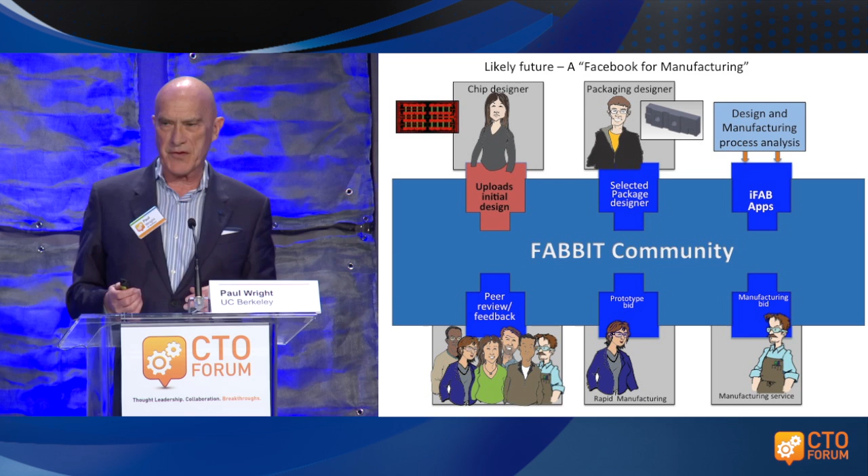So in this final slide of mine, you have to look at this in real time. This is a design being done in a lab, and it's being sent over the internet to a molding company. The idea here is that the designer says, I'd like to set up a mold to cast this model in bronze — how should I go about it? But immediately, that person is getting real-time feedback from the molding house, which might be many time zones away, discussing some of the more difficult parts of the device.

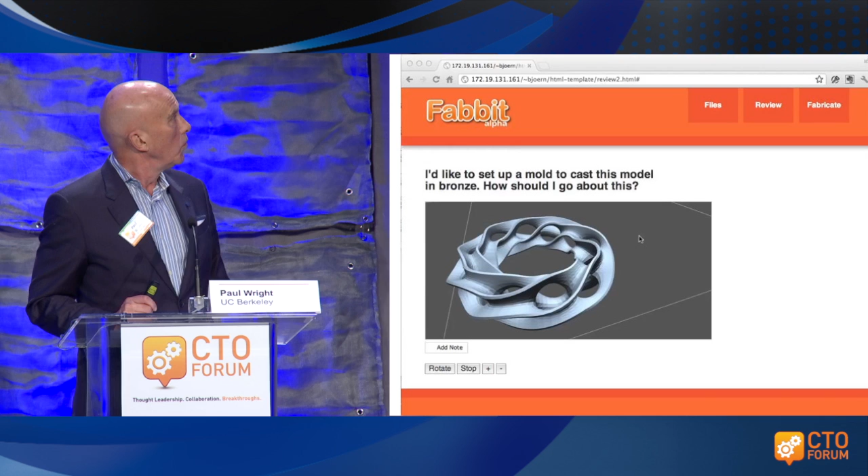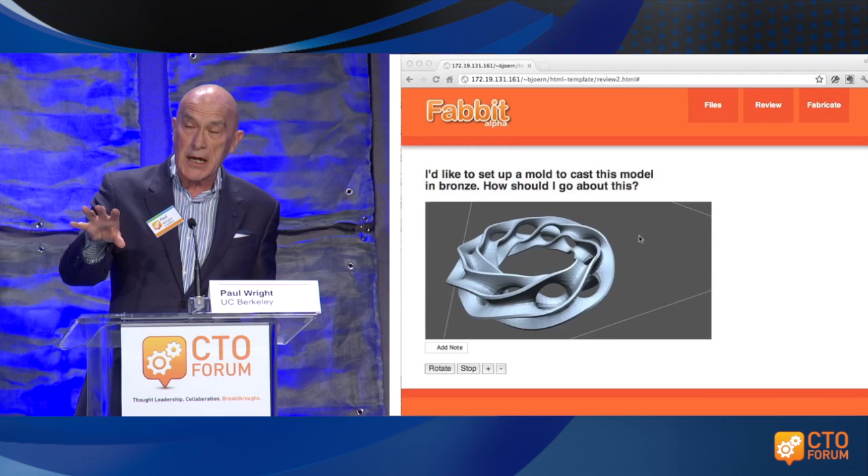As the end of the product there, what happens next, if I'd continued this, is the designer is told by the manufacturing people that it can be made, but it has to be split into 4 different components — there have to be 4 separate molds — so you can go ahead provided you make this particular change. The goal, what I thought about this project a long time ago, was that I wanted to have a silver-haired machinist looking over the shoulder of a younger designer, trying to give them pop-ups and advice about how to get that going.

Even in my class, I emphasize very quickly, even though I'm teaching them about 3D printing, that it would be a disaster if they leave the class thinking that 3D printing gives you the device, because eventually it's going to go to a molding house and you think about draft angles, shrinkage, will the mold fill, and will the printed circuit board fit in there? So this interactive design that I tried to capitalize on in that previous slide, I think is really key to manufacturing and the front end to manufacturing.

So with that in mind, I think the first thing I can do is hand over to Jason, because with his really exciting technology around 3D printing, I think he can describe some really interesting new techniques there with many new different kinds of product opportunities. But I think you'll agree there's some advantages to traditional manufacturing, but you have to be careful and wily about how it's going to be rolled out in volume. Is that a nice tee up for your talk?

Sure, that's terrific. Yeah, it's a pleasure to be here. And what I'd like to talk about today is 3D printing, but I'd like to start with the question of why isn't 3D printing used in manufacturing? I think immediately two answers pop up.

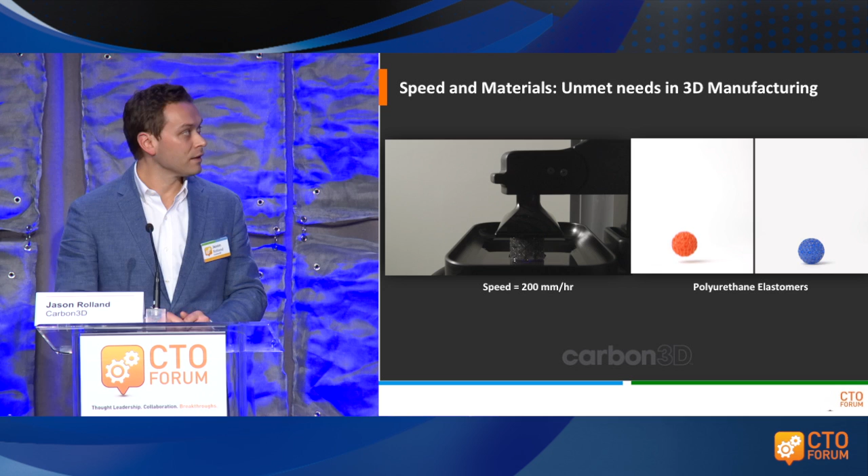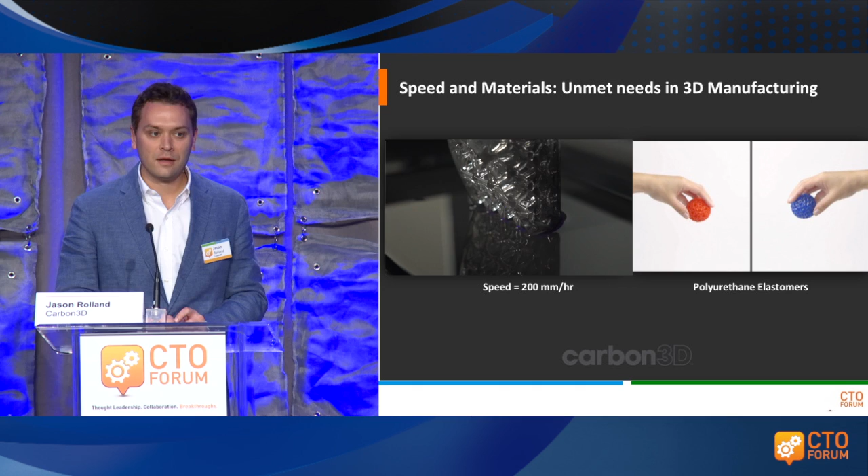Another big issue that we believe is solved by CLIP is we're able to print with new material, high-performance elastomers. The unique features of CLIP have allowed us to create many different categories of materials useful to designers. Elastomers are very difficult for any 3D printing technology, and we've been able to unlock chemistry that allows one to do that. I have samples at my desk if people would like to see them.

So in closing, Carbon3D exists to enable designers and manufacturers and creators like yourselves to create the products of the future, starting with the functional prototype, but eventually paving the way to 3D manufacturing and being able to open up and free creators from the design constraints of generating products.

That's a great summary. Thank you. Thank you very much, Jason. Let me switch now to Robert, who also has been prototyping new products in the space of microfluidic systems, biomimetic camouflage and display, in the same kind of space as Jason. Robert, maybe you can expand on some of your prototyping work and markets for it.

So I'm actually a consumer of machines like the ones Jason is making and adapting them for new things. If you think about the assembly of transducers into complex machines like actuators and sensors, you can start with basically soups of liquid that do interesting things, like that are electrically conductive, allow capacitive sensing, and allow forceful actuation and electrical displays. And you can use existing manufacturing systems like injection molding, rotational casting, and even 3D printing.

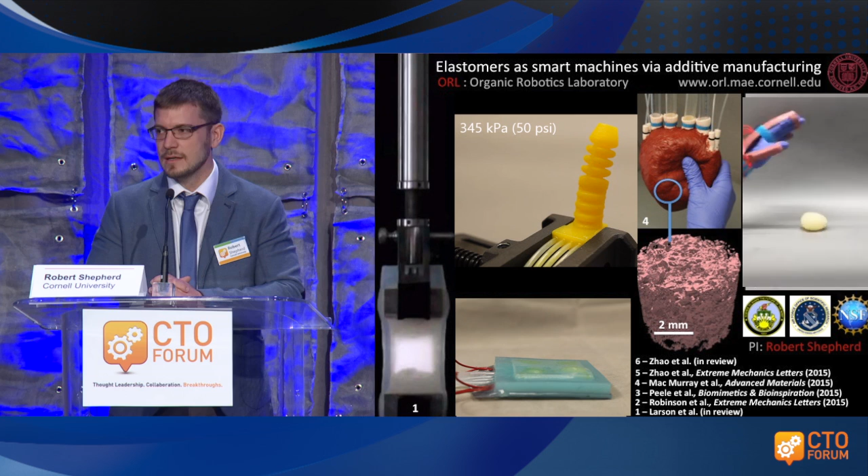So this display on the left is the most extensible display in existence using electrically powered light emission. It's a linear strain of 500%. The next best system that I'm aware of goes to 200%, an OLED-based system. Made very cheaply, very quickly. It's obviously a low-resolution, 1 pixel centimeter square area display, but we've actually now scaled it up to millimeters squared over 10 square inches.

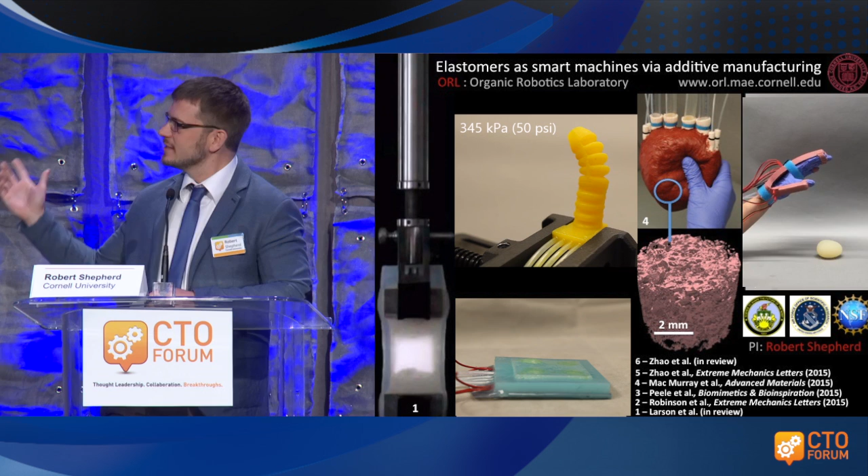The yellow tentacle-like thing was 3D printed on a system similar to what Jason talked about, but much slower because we don't have Carbon3D's substrate capabilities, and I assure you we will be the first people to buy it academically when it's available. The heart that you can see is an injection molded silicone foam that pressurizes two internal chambers and actually pumps liquid. We intended it just as a demonstration, but it turns out that medical doctors really do believe it's useful for non-invasive or less invasive ventricular assist devices.

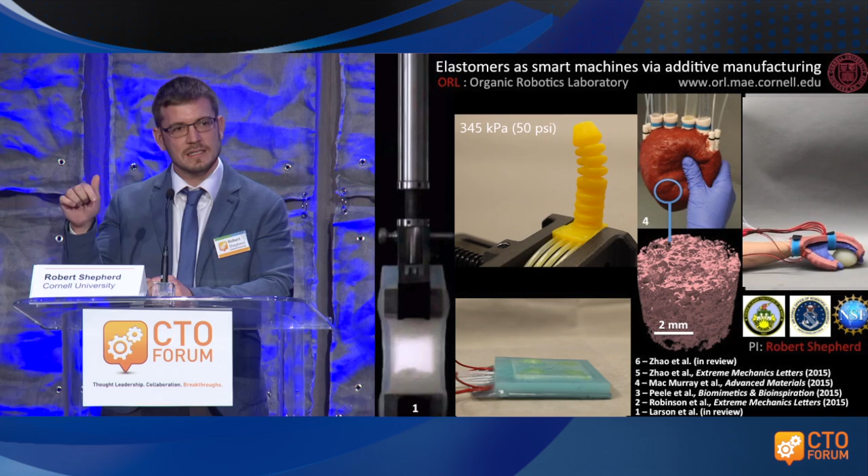And the video on the right shows an orthotic that we rotationally cast, a feedback-controlled orthotic that allows assistive manipulation of delicate objects, as well as allowing people with reduced musculature to apply greater forces and assisting in the rehabilitation of stroke patients. The bottom left video shows a feedback-controlled haptic interface with a soft skin that operates a lot like your skin on your hand, feeling touch, and then it displays that back pneumatically. All of these using existing manufacturing methods, very rapid.

And I'd like to point out, continuing the theme of talking about Toyota, that their vision is one-piece workflow. And these methods are all intended to get towards that ideal. And with Jason's technology, I think you can actually get to that ideal. Good, that's a great start. And Rob, we'll come back to both of you in a second.

Now, with Jim next to me, the thing to really begin to stress is how do these very exciting technologies that you've seen in these videos, producing one or two components at the beginning—and Jason said it's slow—and you don't always get a product out which is mechanically viable. Eventually, all of these exciting new technologies need to be scaled up in factory situations. I think that's where Jim has the experience of doing that kind of work, and I'd like to hand over to him to look at the big production volume aspect of these exciting new technologies.

Thanks, Paul. So I'll move us from micro to macro. I have UCLA by my name, but I'm actually here as a result of the SMLC in the upper left-hand corner—that's the Smart Manufacturing Leadership Coalition. I'm the CTO of that organization, which is 50 companies and institutions implementing smart manufacturing. So you're going to find that my remarks are very, very similar to Paul's.

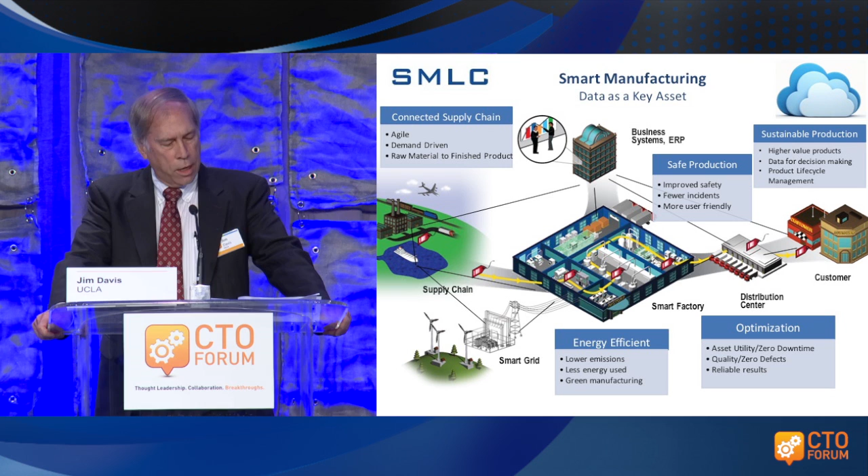It is about getting at sub-optimization, where there are seams and transactions, as we call them, as a result of compartmentalization, and it is about going after untapped opportunity with enterprise optimization. The one thing I would add to what Paul was saying is, to us, smart manufacturing is about unprecedented real-time data and modeling capabilities that are applied through modern cloud technologies—technologies that have already transformed other economic sectors. So we're bringing cloud in a functional way to manufacturing.

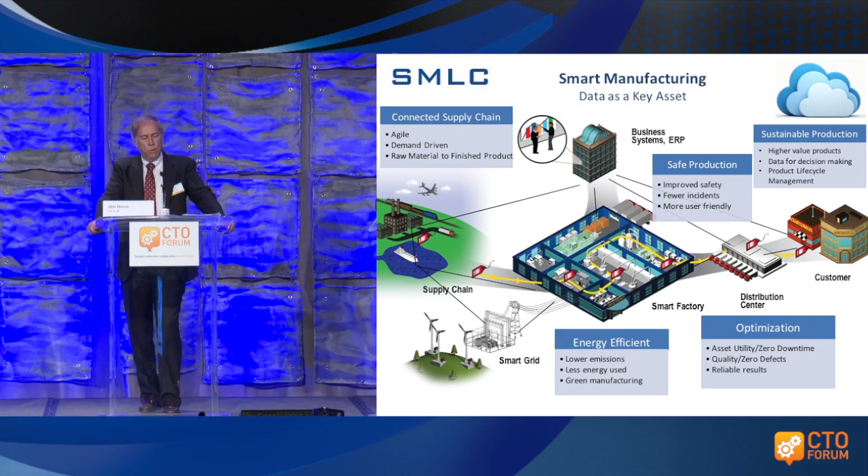So I'd like to just explain smart manufacturing with a few simple examples from our coalition. If you just think about the chart from right to left: one of them is General Mills in Minneapolis, which is shifting from error-prone product forecasting to customer demand-driven production, and it is reducing its inventories—by reducing it, you reduce the probability of contamination.

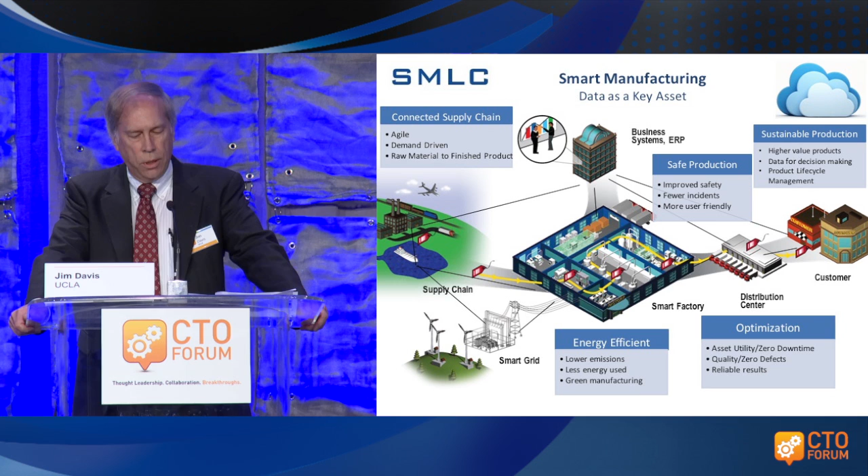Praxair in Port Arthur, Texas is using image sensors and high-fidelity modeling so that they can see and shape energy distribution inside a steam methane reformer, saving many percent of energy, and they'd like to do this in 12 other plants across the U.S. We have a large aerospace company that would like to brand its product as environmentally sustainable. We have a wine company that would like to brand its product based on chain of custody.

General Dynamics in Scranton, Pennsylvania is dynamically configuring heat treatment furnaces to improve metallurgical properties so they can reduce defects and reduce machining and electric costs in the downstream processes. And we have a region of small companies in California that would like to save electricity costs but work as a collective with the utility, so that the utility can manage peak load and bring renewables into the grid in a better way.

So these are all examples, but going back to the main point—the same point Paul was making—data is an asset. Modern cloud technologies as industry infrastructure, from our perspective, make it possible to change the paradigm: to take the application to the data, instead of taking the data to the application. It is a paradigm that changes the business model, and it cuts cost and time to deploy systems in half.

And then, from our perspective, smart manufacturing is the business vertical of the Internet of Things. As I said, the SMLC is a coalition that has come together to implement industry-wide infrastructure to tackle this problem.